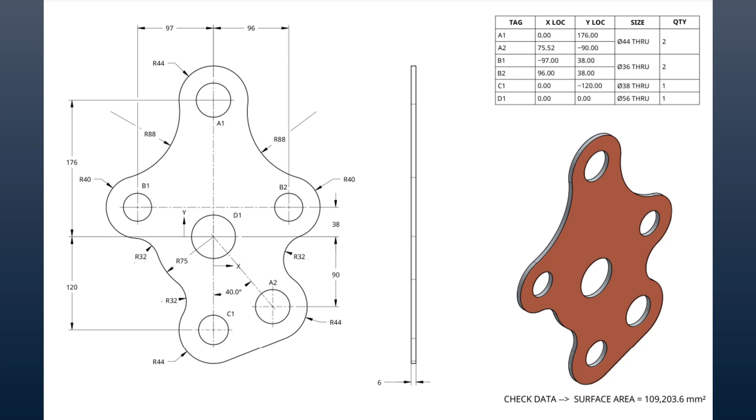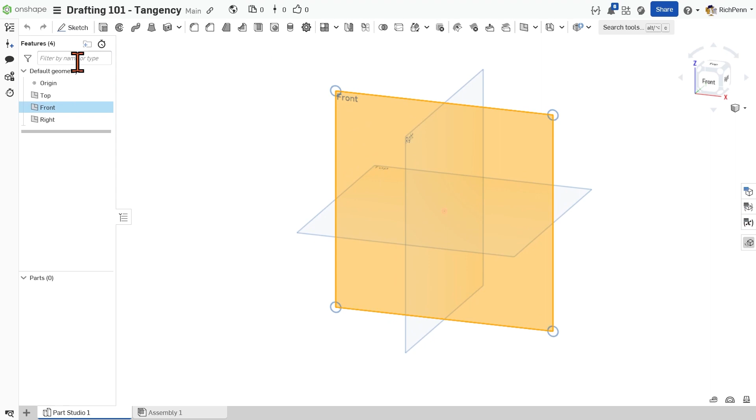Okay, starting in a new part studio, we'll go to the hamburger menu, pull down units, select millimeters, go to mass, take grams, check mark, and away we go. Starting on the front plane, we'll start with a sketch. Well, that was a weird jump. Go N for normal. I'm going to turn on keycaps. Every time I push a key, you should see it in the lower right-hand corner.

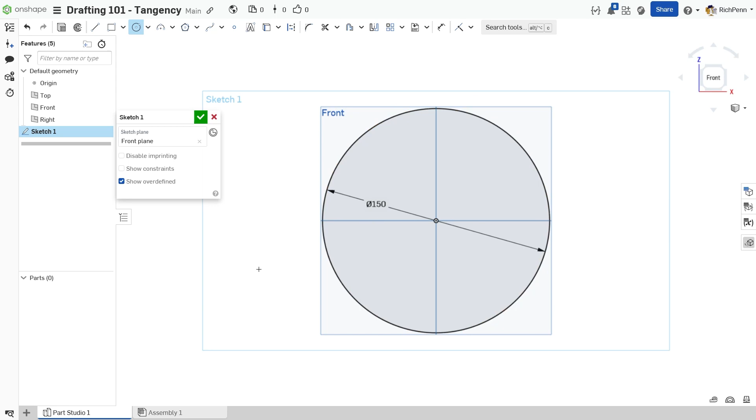Okay, starting with a sketch on the front plane, we're going with a 150 circle, which fills this little radius on the left-hand corner between the circles. We'll zoom way back out. We will go to the top using a vertical dotted line. When we get up here, we'll make a circle. The circle is radius of 44, diameter of 88.

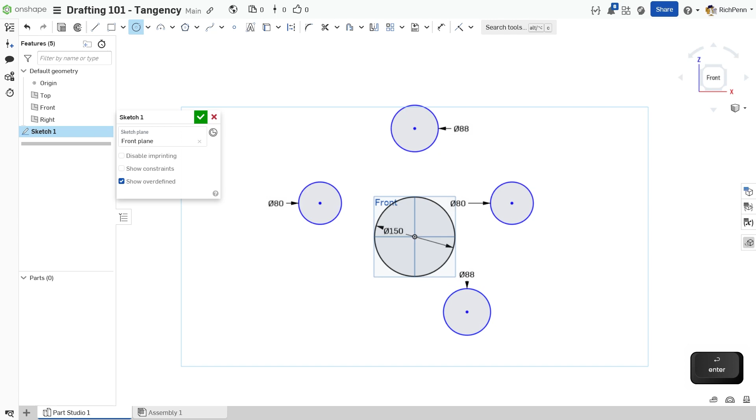We also have two circles that are radius of 40, diameter of 80. They are horizontal to each other. We'll start on one, drag across holding the dotted yellow line, and get this one over here at 80. There is one from the center down at a 40-degree angle. It is an 88, 44 radius. And there is one directly below the origin, so we'll follow the yellow dotted line, come down here, and put an 88 in there also.

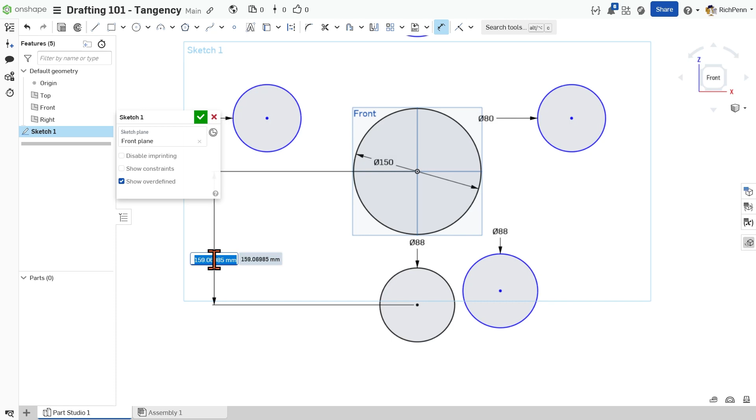Now we'll go to dimensions. We'll start with this one since it's the easiest. We'll put out, and that one is a 120 to the bottom. While we're down here, we'll go to line, go to construction line, put a construction line between the centers, escape. D for dimension, we will dimension the included angle at 40 degrees.

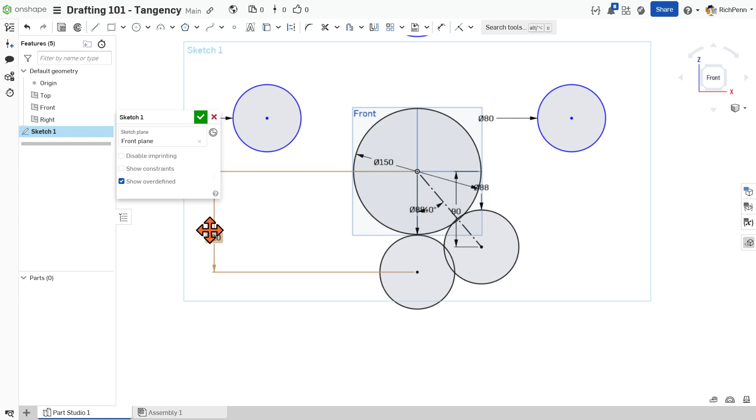And then we will select the horizontal line, the center point, and that measurement is 90. I'm going to pull it in and get it out of the way because it's going to get to be a mess in a minute. Now, the two horizontal circles dimension vertically from their shared origin up 38.

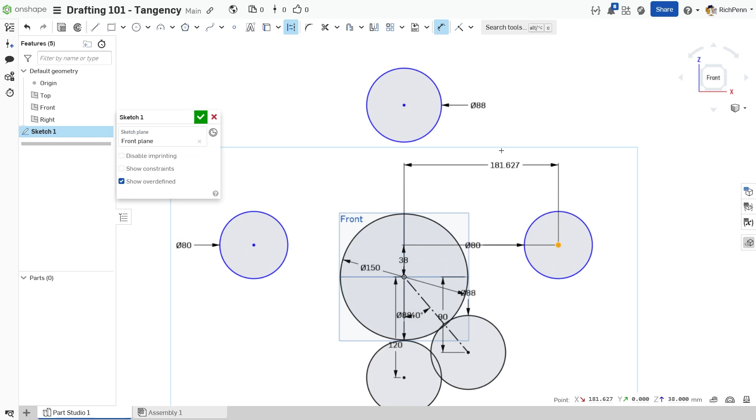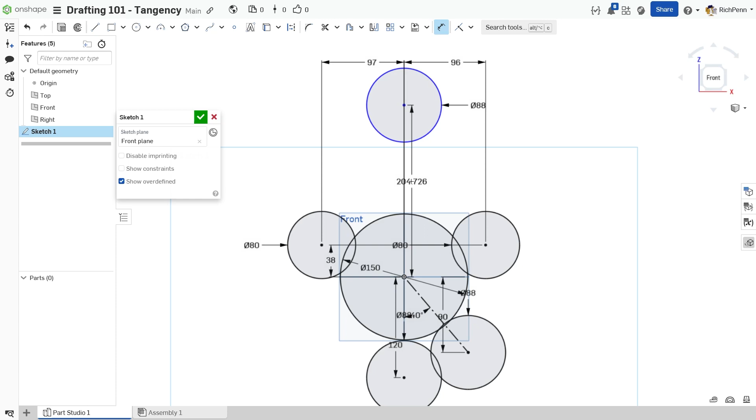The distance to the right is 96. The distance from the origin to the left is 97. And the vertical distance from the origin up to the top circle is 176. And that gets us all of our parts that we're going to need. Pull some of this down to get it out of the way. Make cleanup a little easier.

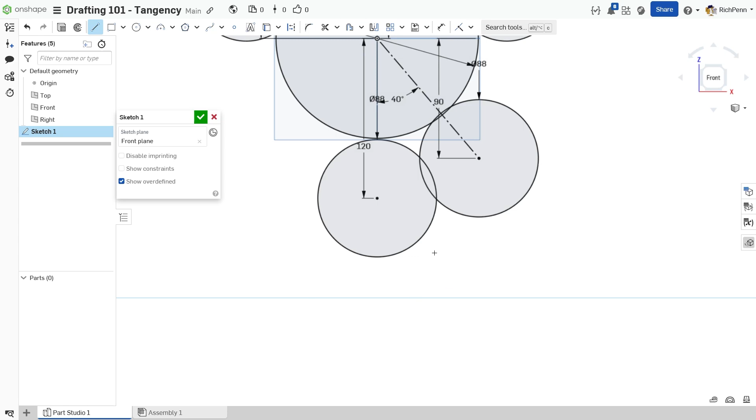Okay, we'll start. I think the place to start is at the bottom. I want to look at creating a tangent line. There are several ways to do it. The easy way for me is to go to line, select one of the circles, and you'll get a coincident constraint. Select the other one and you get a coincident constraint. Hit escape, press T as in tangency, select box up and to the left, and you'll get both the circle and the line and a tangent point.

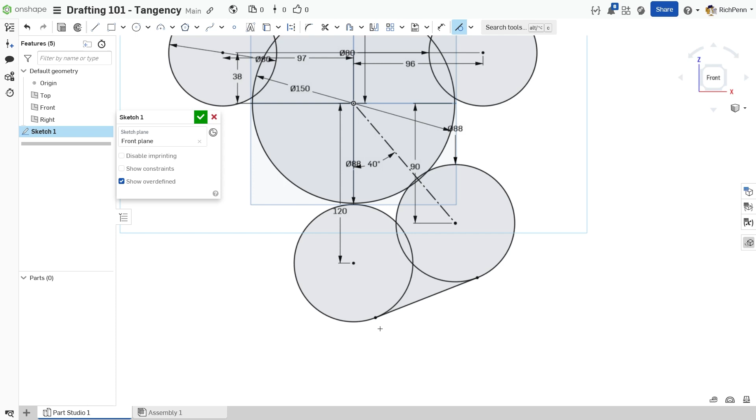Now we'll come over and we will select the point and circle going to the left again, and we will get another tangent point. If we select going to the right, in this case we get nothing, because selecting to the right, you only get what is fully enclosed in the box, and since we have segments of lines and segments of circles, we would get nothing selected and we would gain nothing.

So let's look at this little fillet right here. This is a radius of 32, so I'm going to go up and take a 3-point arc. I'm going to put 1 point coincident on that circle, 1 point coincident on that circle, and then pull the center slightly to where the concave is towards the center of the part. It asks for a radius. I'm going to type in a radius of 32.

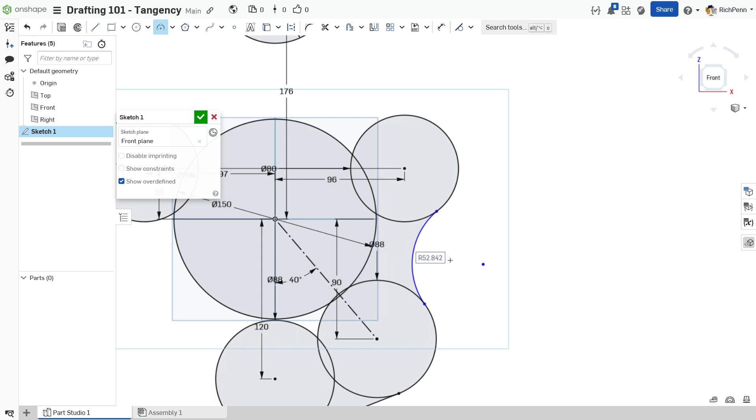And then if we zoom in a little bit, we can go back to tangent with a T, box select, going left, box select again, going left, and we have our tangency for that fillet. Now we have a very large 88 here and an 88 on the other side.

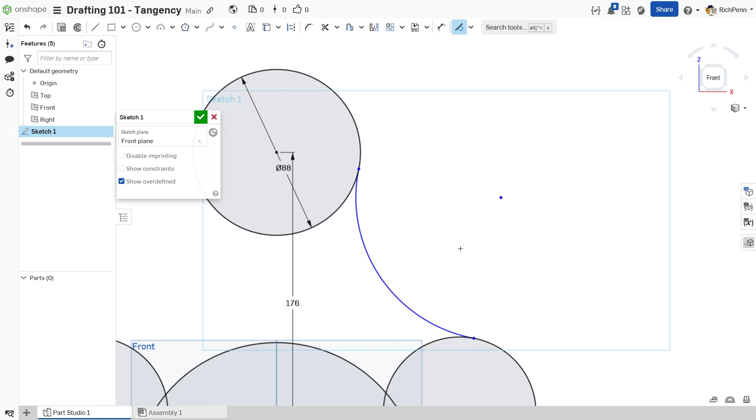So we will go to a 3-point. We will do the same thing we did a while ago. 3 points, just so the curve is going the right direction. T for tangency. 2 left selects. And a dimension of 88.

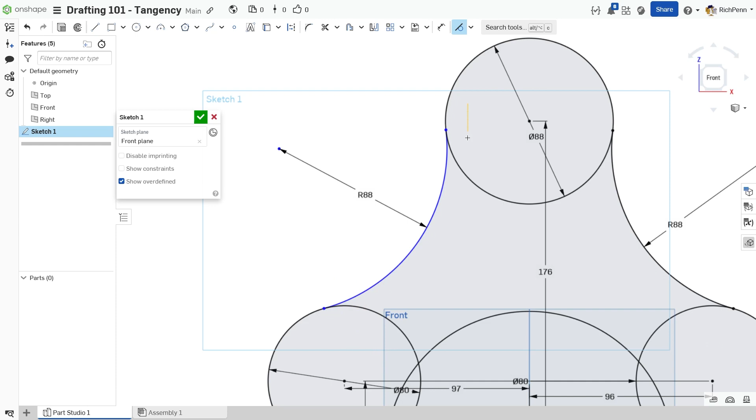We will go back to the 3-point circle. Coincident on that circle, coincident on that circle, back here, type in 88. Then we will go to tangency and pull down and left, pull down and always to the left, and now we have this fillet finished.

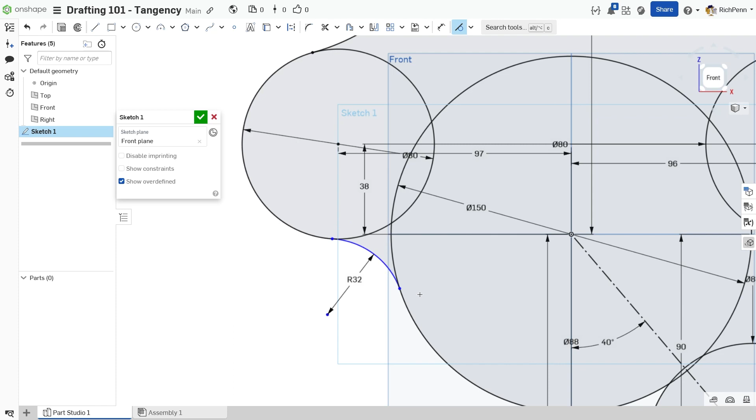We have 2 little nasty fillets in this corner right here. We can come in and take our 3-point and go 1, 2, 3, those are 32s. Go to T for tangent, up and left, down and left, and we have finished that one.

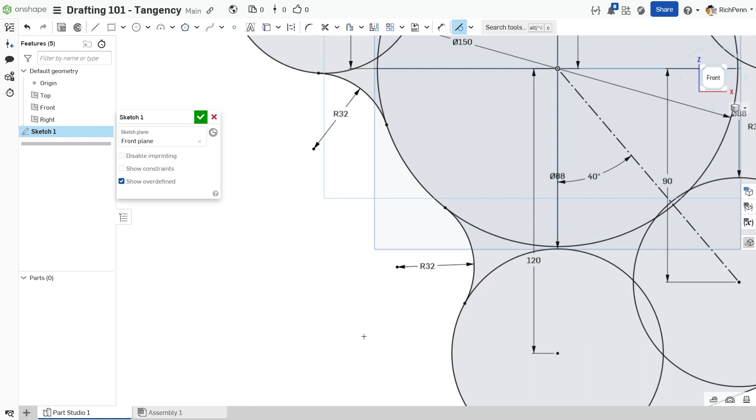Now we will go back to 3-point arc, 2 points, pull it to the right, and put in 32 for the radius, go T for tangent, pulling to the right, it selected nothing. Pulling to the left, it selected the arc and the circle. So pulling to the left again is the arc and the circle, and we have the periphery of the part finished.

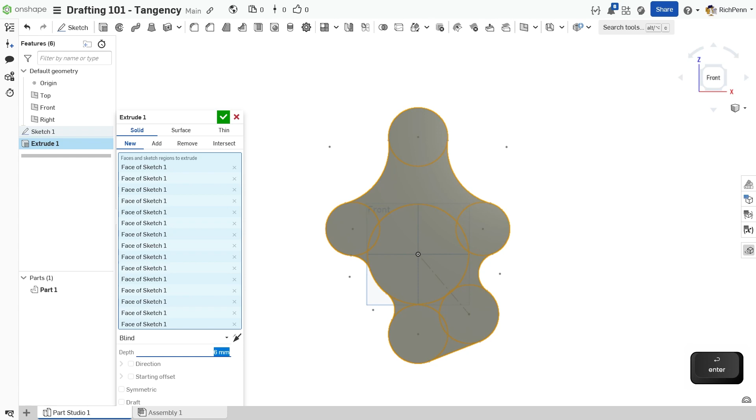Now we can green check mark and we are finished. We don't have to clean this sketch up. We can simply go to extrude and we can box select either to the right or to the left as long as we take all of it. The depth will be 6 millimeters, enter, enter, and there's the part.

We have holes to do. If you'll look in the upper right hand corner of the blueprint, there is a hole table. A1 and A2 are 44, so we will select the hole tool. We will set it for simple. Start from sketch plane, blind hole, custom diameter, and this one is going to be 44.

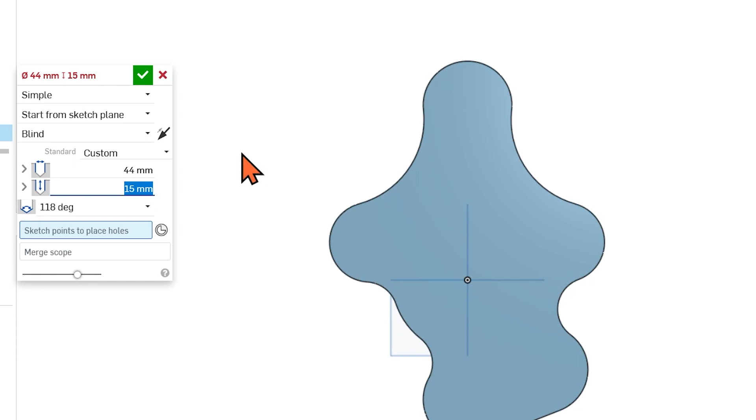Hit the tab key, select the mate connector, and the A is up here so we can move up in the approximate location of the center of that circle and click, and you will get a hole. We're going down to the approximate center here, click, you get a hole.

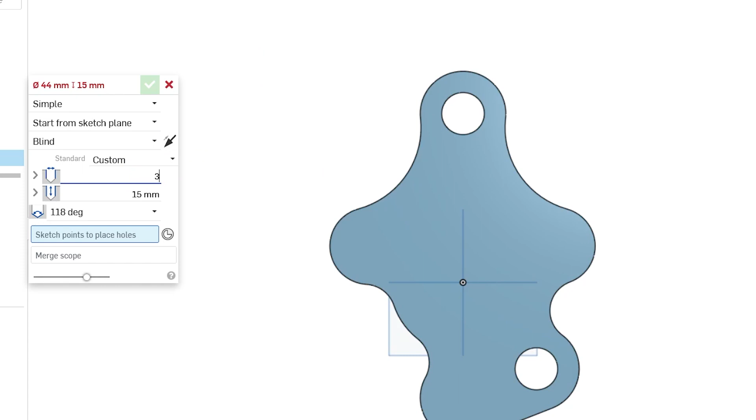Hold down the shift key and press enter. That is a recycle from Onshape. It's fairly new, but it sets whatever you have and it brings the feature back for reuse. So our next one is 36, so we're just simply going to type 36 tab.

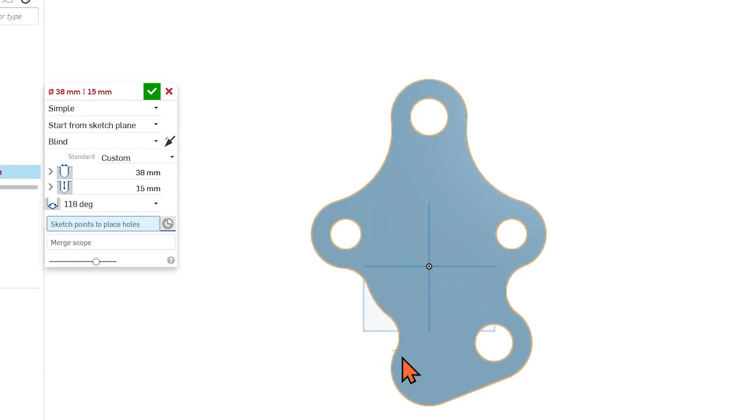Select the mate connector, and those are B's, and B is out here, and B is straight across over there. We're going to do shift, enter. We're going to type 38, tab. We're going to the bottom left corner after we select the mate connector. One click, shift, enter, and we have one diameter left, and it is 56.

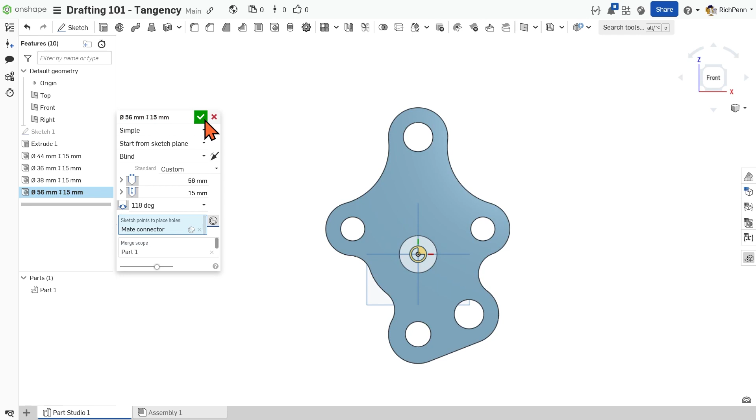Tab, mate connector, center of the part, green check mark, and we should be finished with the part. To check the part, we will go to the little scales that says display mass properties, click on the part, and the answer should be 109203 millimeters squared. If that's the answer you got, we have a good part.